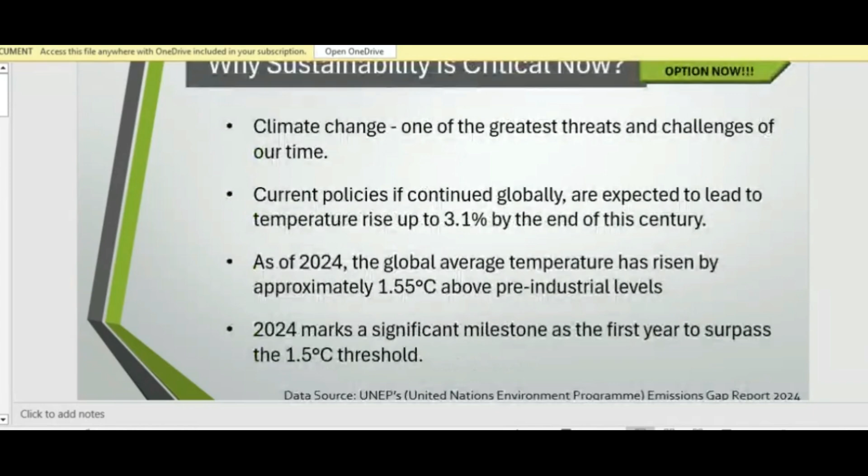So to start with, yes, sustainability. Sustainability is critical now. It is no more an option, it is a necessity. Why? Because the world is developing, economies are emerging, technologies are advancing, and as all these things happen, even population is rising. And as all these things happen, energy is a must - there's a lot of need for energy.

And as energy consumption increases, obviously there is an emission rise, because we generally depend on fossil fuels most of the time. So if you don't keep a check on this energy consumption, that fossil fuel energy consumption is going to give a drastic output on carbon dioxide emission, and the results are going to be catastrophic. Even it is said that if we don't check the emissions now, the global temperature can rise up to 3.1 degrees by the end of this century. It's a report which stated it can rise up to 3.1 degrees. Imagine what is the fate if the temperature rises up to 3.1 degrees. So it's going to have a catastrophic effect on planet Earth - the vitality of the Earth will be lost.

So this is the reason why we are here, discussing sustainability. In the Paris Agreement, it was agreed - I hope you are aware of the Paris Agreement, it's a part of COP21 in 2015 - it was agreed to limit the temperature rise below 2 degrees, and all countries are supposed to work towards attaining 1.5 degrees.

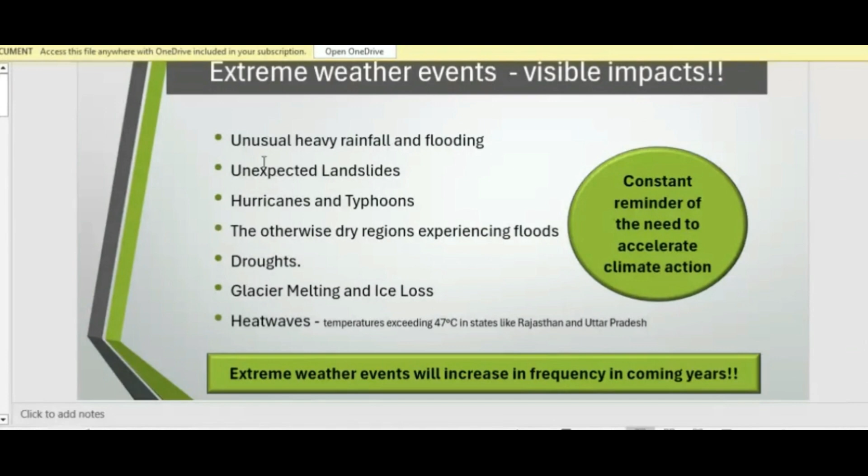So what are all these? These are constant reminders that we need to accelerate our action. We need to take action immediately, else the results won't be good. These things are not going to stop. These extreme weather event frequencies are going to increase in the years and days to come. So it's a caution for all of us.

And before going to the aviation area, let me introduce, maybe you might be aware, but I'll brush through all these global terminologies used in relation with climate change. So the first one is UNFCCC.

It's the United Nations Framework Convention on Climate Change. It was set up in 1992. It's the major global body which sets the framework for climate change, what action needs to be taken. It fights climate change, sets framework, supports international agreements, and promotes financial and technical support. More than that, it organizes the annual COPs.

You might be aware that last year, in 2024 November, we had COP29 at Baku, Azerbaijan. Every year before that, we have been having this Conference of Parties. COP is nothing else but the Conference of Parties. So we'll see what it is in the coming slides.

Next is the IPCC, again one of the important organizations, the Intergovernmental Panel on Climate Change. It was set up in 1988. It's again a UN body, a scientific body that assesses climate change year by year, and publishes assessment reports which form an input to the COP discussions and many other climate change discussions. It also assesses the impact of climate change and gives response strategies.

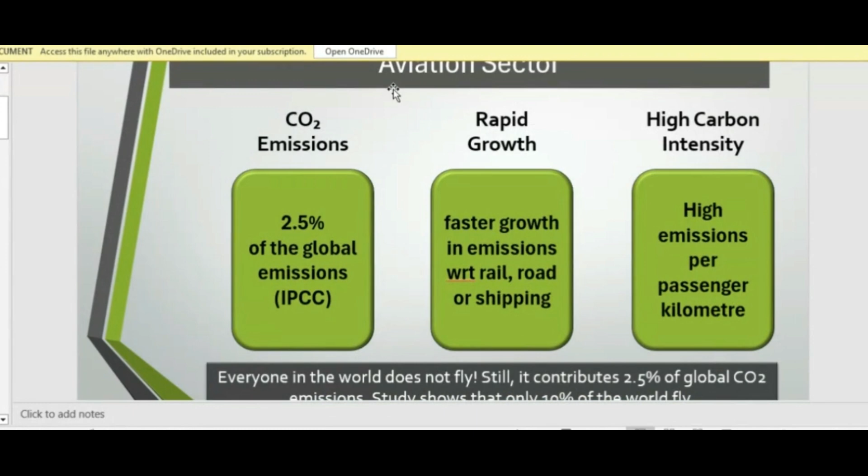Let's talk about the aviation sector. Why is the aviation sector important? Because 2.5% of the globe's total emission, that's a report published by IPCC, 2.5% of the globe's total carbon dioxide emission is from the aviation sector.

That too, while we know everybody does not fly on the earth. Hardly 10% of the people in the world fly as of now. But as they get richer and connectivity increases, obviously there are going to be more flights, more people flying. With the current 10% people flying, if the emission is already 2.5%, we can imagine what the emission will be if more people start flying. This is why it's alarming, this is said to be alarming actually.

There's a rapid growth in the aviation sector, as more and more people prefer to fly. People who wanted to travel, say 20 years back, from Cochin to Delhi, would mostly have chosen train travel. But nowadays people value their time, and tickets are available at comparatively lesser rates, so they choose flights instead. So there is rapid growth happening in the aviation sector, and with that comes faster growth in emissions. Compared to other transport media like rail, road, or shipping, the aviation sector is emitting more. It is a high carbon intensity area.

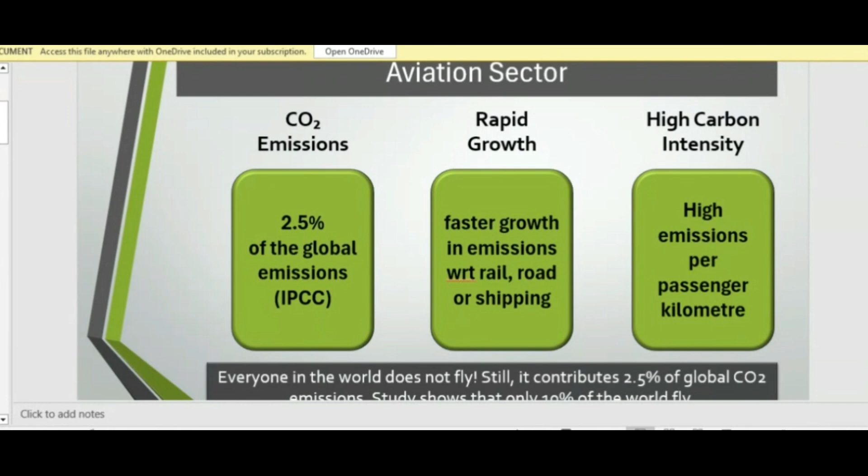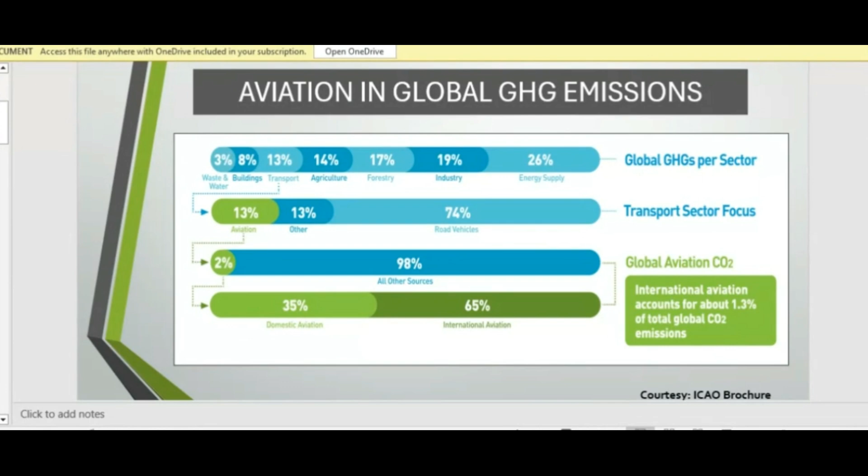Now, in this 13% global aviation, domestic aviation contributes 35%, and international aviation contributes 65% of aviation. So we can say that international aviation accounts for about 1.3% of total global carbon dioxide emissions. This is a report published by ICAO, and it is almost 90 to 95% realistic.

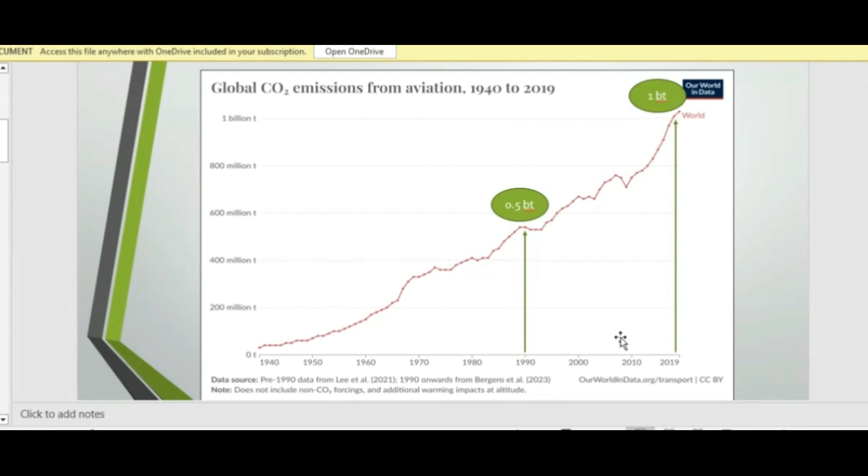So here is where you can see the scale of growth of emission by aviation alone, and the importance of sustainability in aviation. We just checked the quantifiable version of this aviation emission.

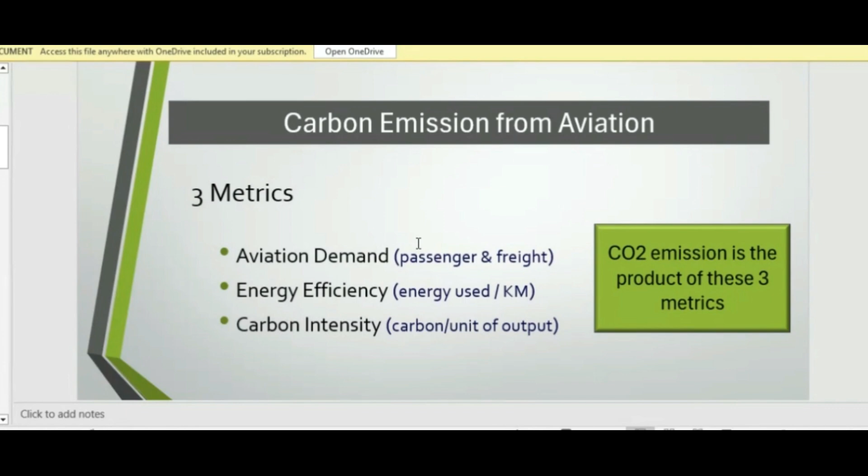Let us see the metrics one by one. Aviation demand represents the total passenger kilometers and total freight kilometers, how many passengers travel and what cargo freight transport happened. As we have already seen, between 1990 to 2019, the passenger demand and freight demand have approximately quadrupled, increased 4 times. More people are flying, more stuff is being moved around. People are opting for flight travel more and more.

Now let us see what is energy used, and its impact. Energy efficiency is the energy required per passenger kilometer, how efficient the fuel is.

Traveling one passenger kilometer in 1990 used to take 2.9 megajoules of energy. By 2019, this 2.9 megajoules has reduced to less than half, coming down to 1.3 megajoules.

So we can say flying has definitely become more energy efficient because of improved designs and technologies, larger planes, and more passenger load factor. Passenger load factor means there are fewer empty seats compared to previous flights.

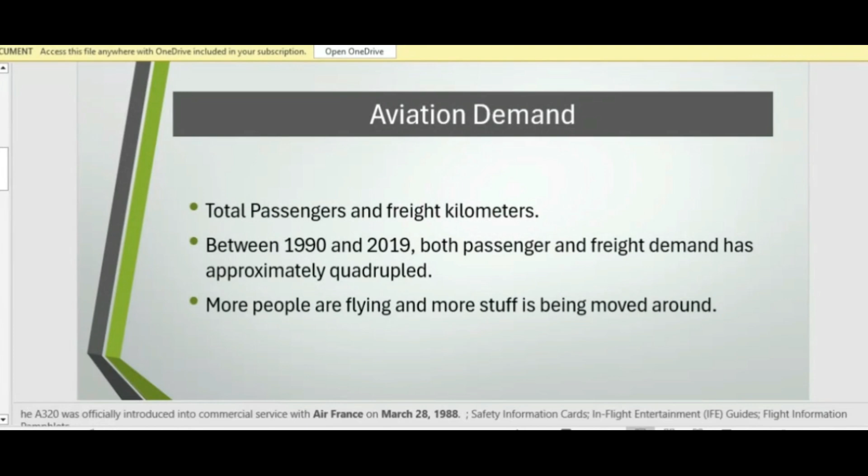Alternate fuels are there — yes, SAF has come into the market, but it is still a tiny fraction. So when we multiply all three, we understand that aviation demand has quadrupled and energy efficiency has increased twice.

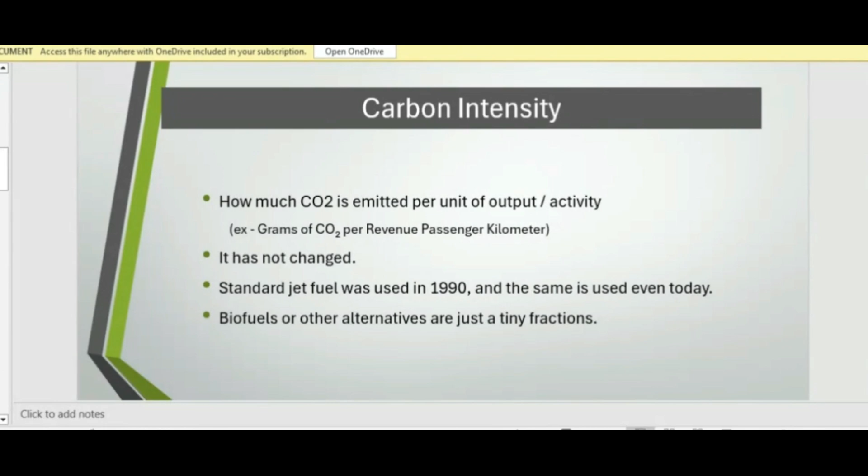In India, the Prime Minister has launched the UDAN scheme a few years back to increase connectivity, including rural and suburban connectivity. As connectivity increases, aviation passenger numbers increase, energy consumption increases, and pollution increases.

There's a metric showing that in 2025, revenue passenger kilometers (RPK) are expected to grow by 8%, reaching 5.2 billion passengers. It means this will be the first year it crosses 5 billion passengers — that's how the aviation sector is growing.

In terms of passenger volume prediction — how many passengers will be flying — 2019 saw 4.5 billion passengers. There was a drastic drop due to travel restrictions from Corona, but we reached the pre-pandemic level again in 2024, and by 2025 it's expected to reach 5.2 billion.

And by 2040 and 2050, there's a considerable increase — it's going 4 times higher compared to 2025. It's estimated that by 2050, 25 billion passengers will be using airlines.

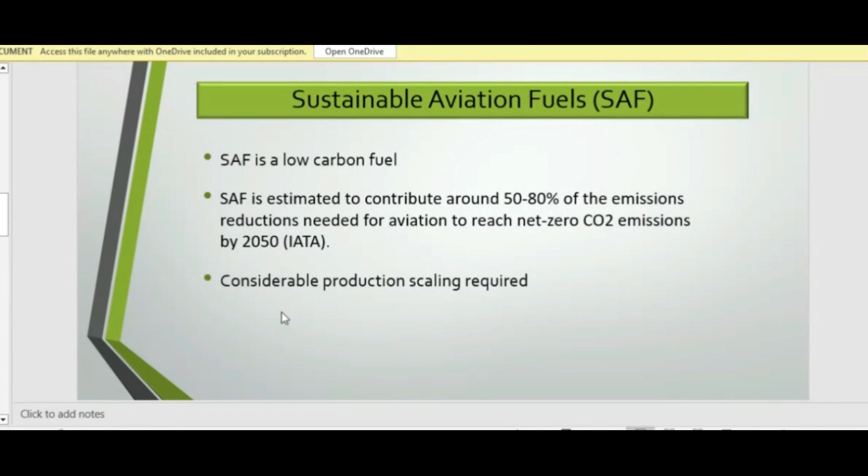Sustainable aviation fuel is a low carbon fuel, and it is estimated that it will contribute around 50 to 80% of the emission reductions needed for aviation. This is estimated to drastically change the pollution contribution from the aviation industry if we adopt it as soon as possible. However, there are challenges in SAF which we'll see.

First, let us see what sustainable aviation fuels are. They are produced from biomass feedstock as well as non-biomass feedstock. Feedstock is the input material that goes into making this aviation fuel. Biomass feedstock can be waste oils and fats, like used cooking oil, animal fats, agricultural residues like straw and corn stover, forestry residues like wood chips and sawdust, even dedicated energy crops and microalgae.

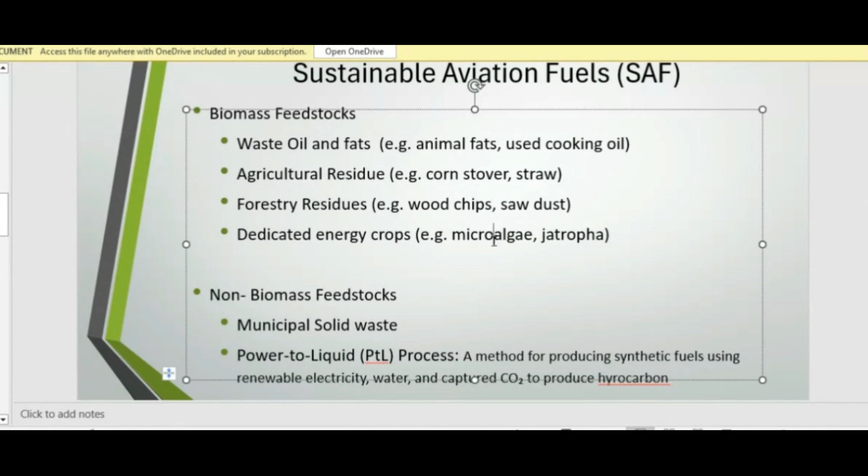Microalgae is under R&D because it can store lots of lipid, lots of fat in its body, and it needs less space and land compared to any other biomass feedstock. This is under R&D, and if it succeeds, it will be a boon to the aviation industry for using sustainable aviation fuel.

Coming to non-biomass feedstock, this includes municipal solid waste like cardboard and organic material that we throw away, which can be used as feedstock for sustainable aviation fuel. There's also the power-to-liquid process, another gaining methodology, producing synthetic fuels, also called e-fuel, using renewable electricity, water, and captured carbon dioxide. Water is split by electrolysis into hydrogen and oxygen.

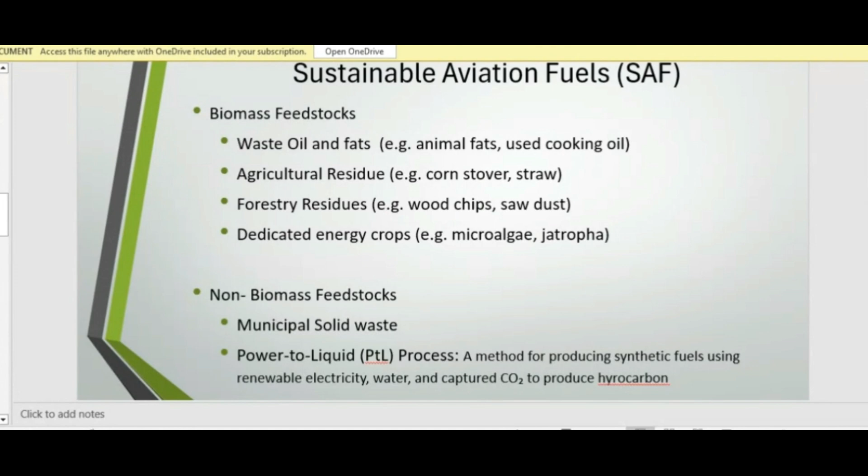This hydrogen and captured carbon dioxide are used to produce hydrocarbon, which can later be converted into fuel. So now the question is, sustainable aviation fuel is gaining importance, but can we use it as such, or do we need to do any modifications?

As per ASTM allowance, the American Society for Testing and Materials has said we can blend 50% of SAF with existing jet fuel with no problem. It can be used in current aircraft and engine conditions, with no major modifications required in the engines. It's called a drop-in fuel because it can be used with 50% blending and work seamlessly without any problem.

But when it comes to infrastructure, like fuel lines, storage systems, refueling vehicles, etc., these are the facilities required to fill the aircraft with fuel. All of these, pipelines, storage systems, and refilling vehicles, are compatible with the SAF blend and can be used as such.

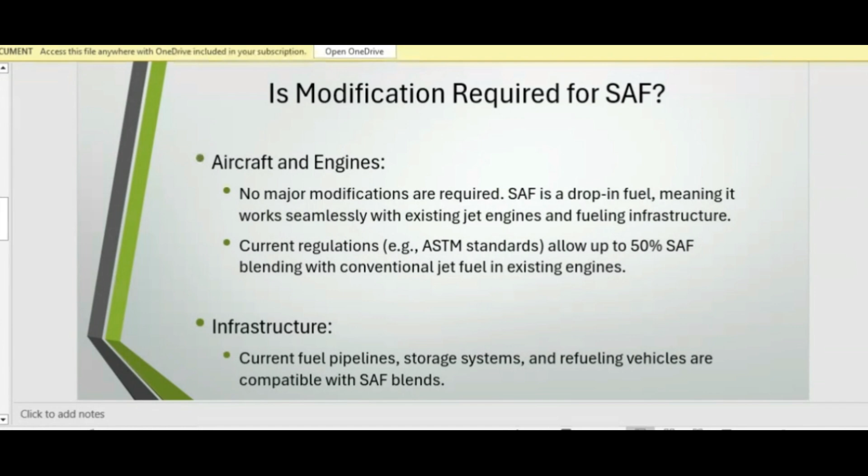So currently the allowance is given only for 50% blending, and R&D is happening to use 100% SAF in existing aircraft, as well as development of new aircraft which can solely work on SAF. So now what is the current usage of SAF?

As I told you, we can blend up to 50% with conventional jet fuel. Theoretically we could use it in much higher concentration, but as per the permission given by ASTM, the industry is using it at a 50% blending rate.

Currently the SAF production is very low, only about 0.3% of global aviation fuel consumption. Suppose in 2024, our demand for global fuel was 300 billion liters, whereas the production of SAF was only 900 million liters. So it was covering only 0.3% of global aviation fuel consumption.

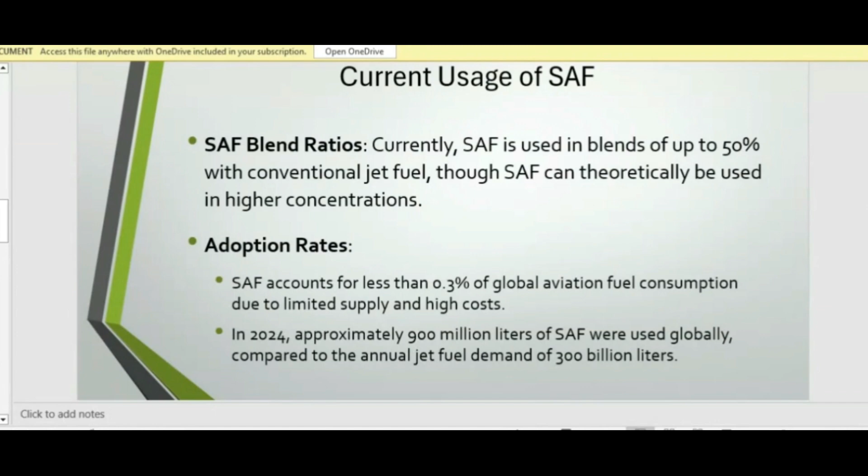So the production rate is very low because it is highly finance intensive, as well as the land required is very high, since it uses biomass. So there are so many constraints. We'll see one by one what those constraints are in the coming slide.

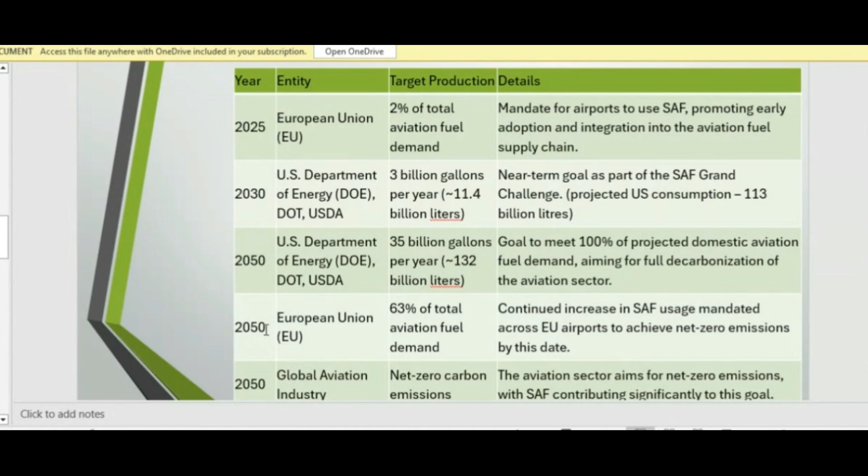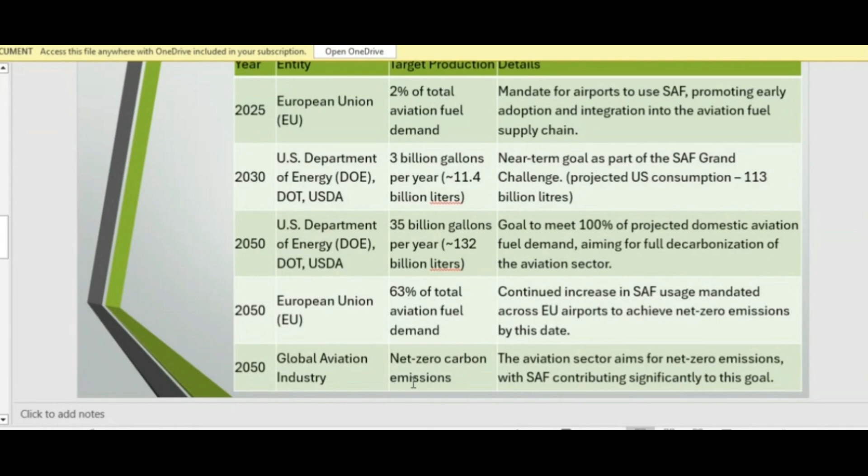And when it comes to global aviation, by 2050 we are aiming for net zero carbon emissions, and SAF has a very important role to play in global aviation.

So all aircraft manufacturers, how are they supporting the use of SAF? Major manufacturers, as we know, are Boeing and Airbus. Most flights are either Boeing or Airbus. So Boeing has already committed that they will be...

delivering aircraft capable of running on 100% SAF by 2030. Because currently, as I already told, we don't need much change in the current infrastructure, aircraft engines or propulsion systems, but still the fuel is different, the combustion and the physical and chemical properties are different. So aircraft manufacturers are trying to adapt to SAF alone and produce aircraft which can solely work on these sustainable fuels, and by 2030 Boeing has committed they will be able to deliver these aircraft which run on 100% SAF.

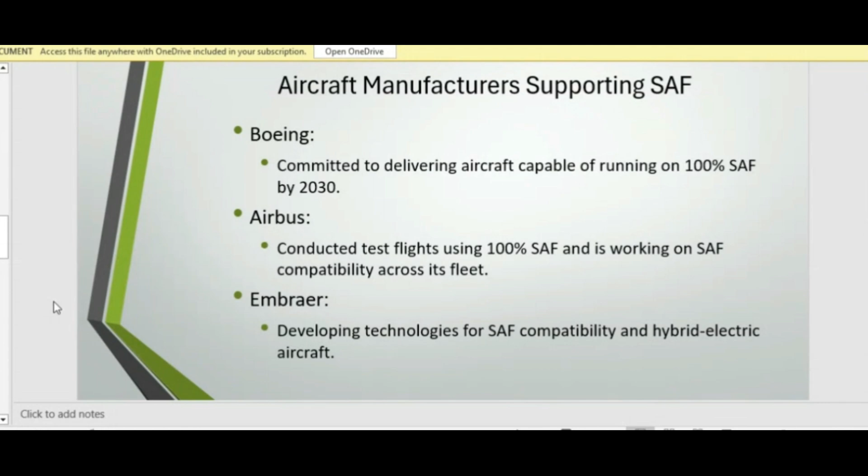Similarly, Airbus has already conducted test flights using 100% SAF, and they are also working toward attaining SAF compatibility across their fleet. The same is true for Embraer, which is developing technologies for SAF compatibility and also trying for hybrid electric aircraft.

So what are the challenges in SAF? The first challenge is the high cost; the production cost is very high. It's also limited in availability. As I told you, only 0.3% is getting produced when the demand is very high, only 0.3% of the total demand is getting produced annually.

So obviously the cost will go high, and currently the cost of SAF is 2 to 5 times more expensive than conventional jet fuel. This is because of the limited production capacity, as well as the feedstock cost. The feedstock, whether biomass or non-biomass, the production cost is very high. So these two are adding up to the high cost of SAF.

Now also the limited feedstock availability. The sustainable feedstock available, like cooking oil, waste cooking oil, or used cooking oil or waste biomass, is not always available in the same quantity. And if we want to grow this feedstock, you can imagine the amount of land required. It can even compete with our agricultural land.

There is one more worry that environmentalists generally have. They are nervous that if SAF gains importance, even deforestation can happen. They can cut trees to plant these feedstocks for biomass feedstock for aviation. So another worry is that it can pave way for deforestation also. This is a concern. Land use can change, like what is being used for agriculture can change to developing this feedstock instead.

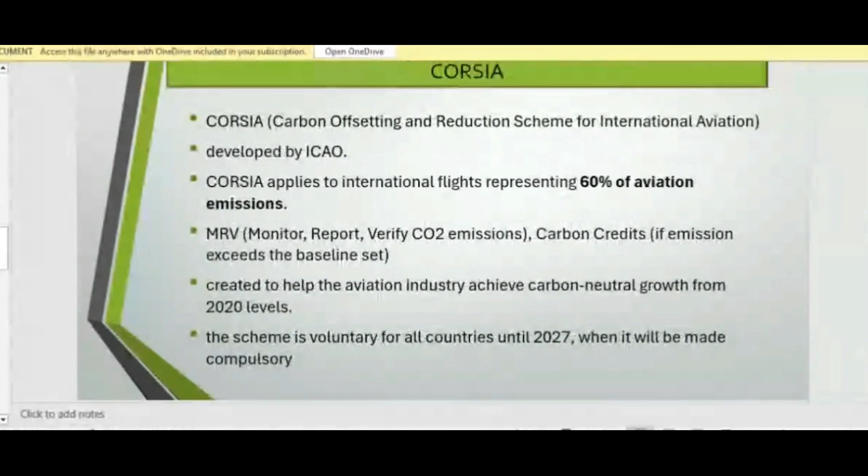So that was the market-based measure, CORSIA. Now coming to aircraft-related technology, how it is going to help us in sustainability. Advanced propulsion systems - engines, like hybrid electric, as I already told, are under R&D. Even fully electric propulsion systems are under R&D. There are two companies, Heart Aerospace in Sweden and VoltAero in France, which are working on hybrid models, like hybrid electric engines.

Heart Aerospace has already demonstrated a fully functional technology demonstrator and is testing it. So once it is proved, it can definitely become a reality.

When it comes to fully electric propulsion systems, it depends on so many things. It's not achievable in the near future. It should basically work using batteries, and batteries make it very difficult to energize the aircraft and give it thrust while flying.

It's going to be very difficult, but efforts are still ongoing on this front. Next is lightweight materials. Composites are gaining advantage here. If we reduce the weight, like in the automobile sector where cars like Maruti reduce weight to improve mileage, similarly if weight reduces, efficiency also increases. So composites are being used more and more.

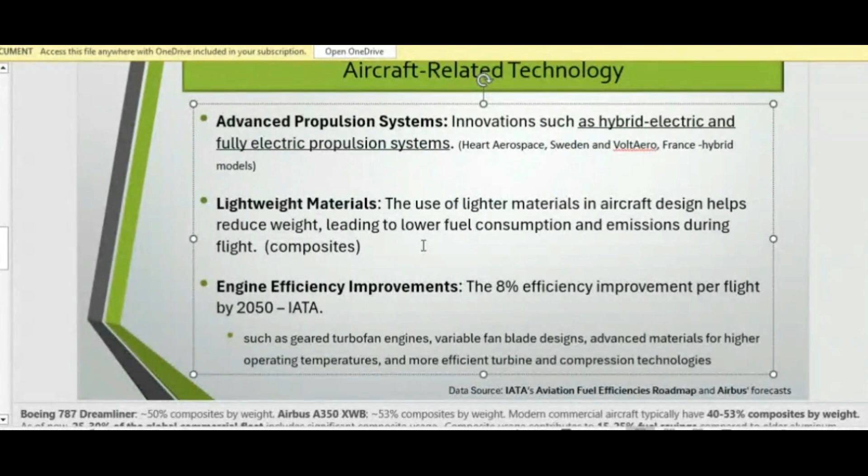That covered aircraft-related improvements. Now, operational improvements—what is covered under aircraft operations? Aircraft operations include activities on the ground before passengers and cargo are loaded, taxiing to and from the runway, and the climbing, cruising, descent, and landing stages.

In ground operations, before passengers and cargo are loaded, multiple activities take place, like refueling, cargo handling, passenger baggage handling, catering services such as food supplies being arranged in the aircraft, cleaning, pre-flight inspection, and crew briefing.

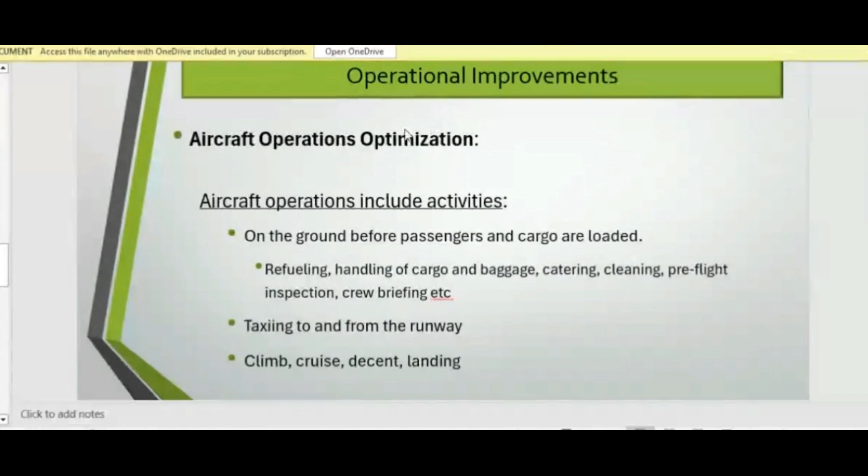So these are various aircraft operations happening before takeoff, before passengers and cargo are loaded. Now there are certain measures we can bring in to improve these operations too, as listed out by ICAO in the brochure.

The first measure is operating the aircraft at the most economic altitude and speed while in the air. Next is the aircraft load factor as passenger load factor, which I mentioned in a previous slide—it should be maximum. An aircraft should not fly with even one seat empty.

Next is loading the minimum fuel needed to safely complete the flight. As the quantity of fuel increases, more fuel is needed to lift and fly the aircraft. So if we keep it at the minimum safe level, considerable reduction in fuel consumption will be seen.

Next is minimizing the number of non-revenue flights. What is a non-revenue flight? It's where payment is not happening—it may be ferrying the aircraft, training, testing, or anything similar. Minimizing these flights is another operational improvement measure where emissions can be reduced.

Taxiing in the most effective way, taxiing and flying in the most fuel efficient way - some aircraft generally use both engines while taxiing, but single engine can be resorted to when taxiing on the ground.

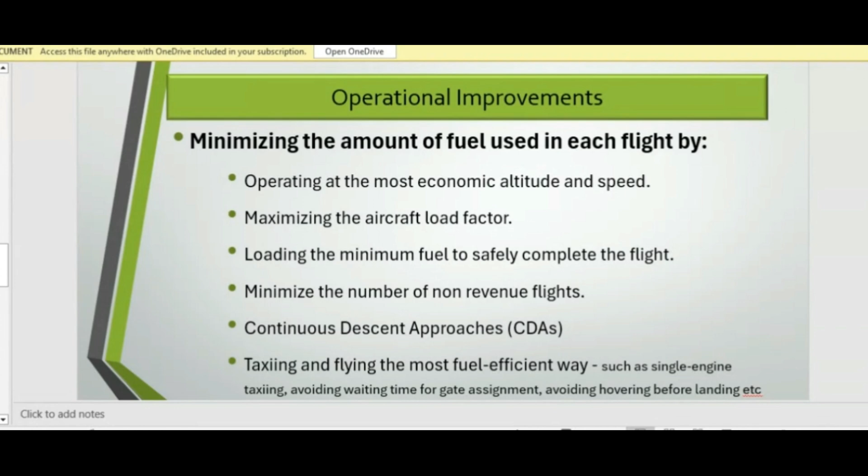Some aircraft will be hovering for almost 30 to 40 minutes. The total distance between destination A and B will be for 30 or 40 minutes, but after reaching the destination point, it will be hovering around the airport to get clearance to land. This is a wastage of fuel, and it can be avoided through operational improvements.

Let us see where India stands in all these things. The Indian aviation sector is contributing only less than 1% of India's total emissions. This is something good to see, but we cannot be happy about it, because the carbon emission from Indian aviation has considerably increased from 2012 to 2019 - in these 7 years, there's a considerable increase of 64% in emission.

So the first sentence about India's aviation sector contributing only 1% is nothing to be happy about right now, because it is definitely going to change in the coming years. India is going to overtake UK as the third largest air passenger market this year, so there is going to be more fuel consumption and more emission.

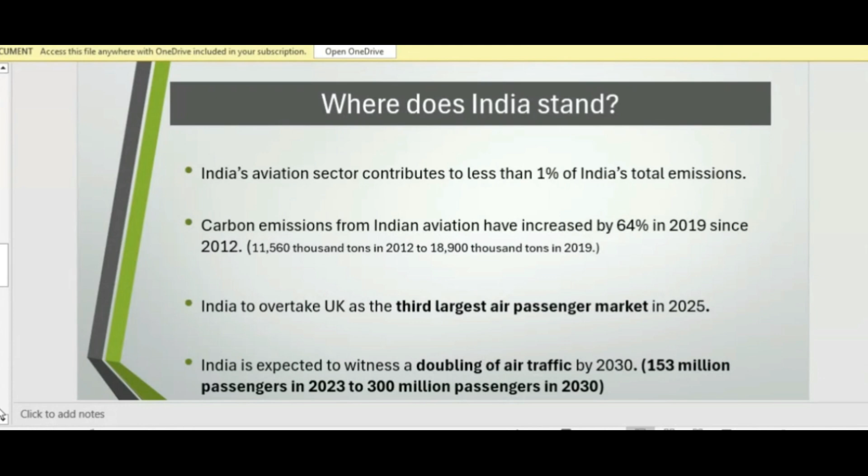India is going to witness a doubling of air traffic by 2030. In 2023, hardly 150 million passengers were flying, and by 2030, in the next 5 years, 300 million passengers will be flying. So it is going to be carbon intensive.

Now growth in the Indian aviation sector - the Indian aviation market was 12.58 billion dollars in 2023, and it is expected to grow at a CAGR of 11.25%, which is way more than our PF investments. It is growing at this rate, reaching a value of $26.54 billion by 2030. So you can see a significant increase in the Indian aviation market size.

The Indian government has launched UDAN - Ude Har Desh Ka Nagrik - which is instrumental in increasing air connectivity to smaller cities. As the UDAN scheme picks up, we can see more and more flying. According to IATA, this aviation sector is contributing approximately 5% to India's GDP, and it supports 8 million jobs.

So this is a sector which is very much required for our growth also - we cannot simply avoid it, we have to take sustainable action. Aviation sector can contribute $250 billion to India's GDP annually from this year. So this is a major sector in India which needs to be considered for sustainability, because it is growing significantly.

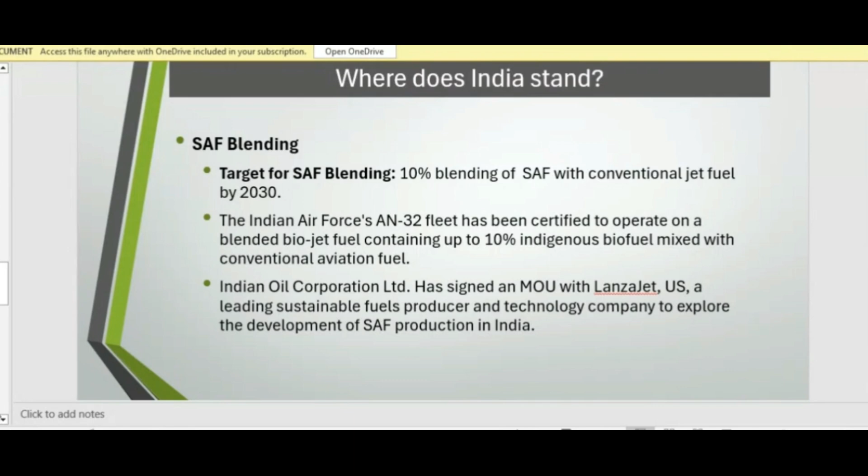Now, what are the challenges to sustainability in aviation? Yes, we have seen the strategies, the targets, and the climatic conditions prevailing, and how it is going to rise in the coming future. There are some challenges we need to overcome to achieve sustainability.

The first challenge is high emissions. The emissions are going to rise. As countries develop and economies surge, emissions are also going to grow. The aviation sector accounts for 2 to 2.5% of global human-induced carbon dioxide emissions, but emissions have doubled since the mid-1980s. So we can expect more emissions in the coming future.

Projections suggest that demand for air travel, which we have already seen is going to increase, could even become 4 times compared to today by 2050. So emissions will rise proportionately.

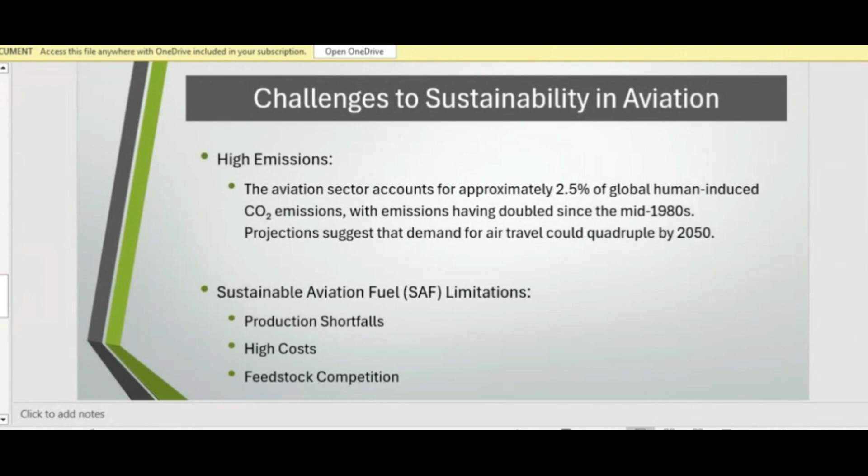The second challenge is the production of SAF. SAF gives us a very positive outlook when it comes to reduction, 50 to 80% reduction of emissions from the aviation industry. But it still has its own limitations and production shortfalls that we've already discussed: the high cost, which is around 2 to 5 times higher than conventional fuel cost, and feedstock competition, meaning feedstock should not compete with land use or agricultural crops. These are the constraints and challenges from the sustainable aviation fuel area.

There are other challenges in aviation sustainability, like technological barriers. As we discussed, hydrogen and electric aircraft face issues. Electric aircraft have lower energy density because batteries will not give us the output we require per unit weight, compared to the higher output from conventional fuel. So we need to see how far this is going to sustain. But R&D is happening, and let's hope we get a very positive output from both the hydrogen and electric aircraft projects undertaken.

Now, infrastructure needs for SAF, which we've been discussing in the past few slides. For production, distribution, and blending of SAF, we need big infrastructure, and this infrastructure will call for investments. So funding requirements come in, and the world is struggling for funds when it comes to sustainability and climate change, climate finance.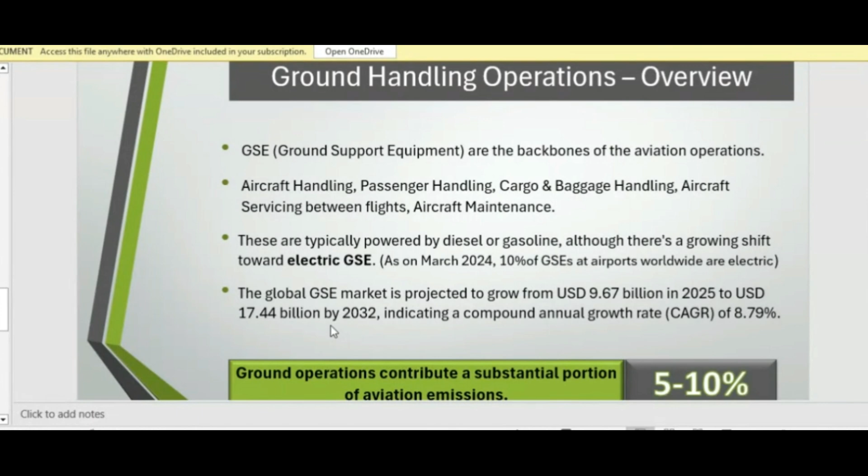The thing to note here is GSE emissions. Emissions from these ground operating vehicles which use diesel and gasoline are almost equal to 5 to 10% of the aviation emission from the aircraft. So this is again considerably high, and there's a large scope of improvement in GHGs also.

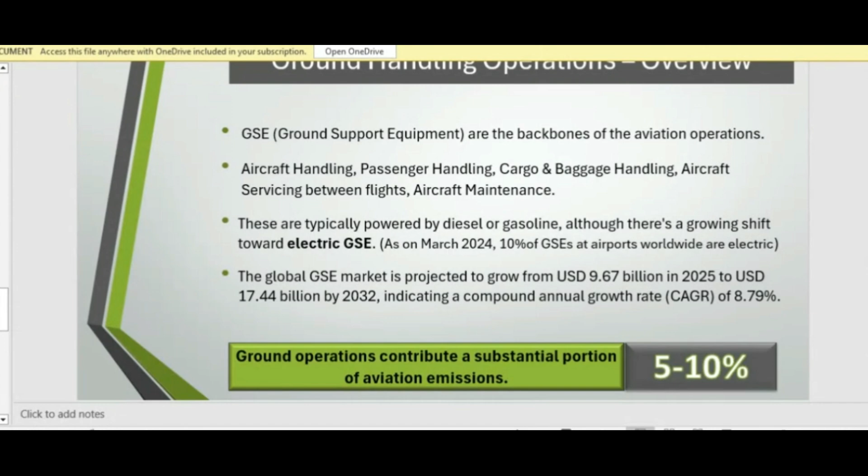So what are the various ground support equipments used? Tow tractors and trucks. Tow tractors are the vehicles used to tow the aircraft. When aircrafts are parked near the gates, they will be towed using pushback tractors, like trucks or tractors, because engines cannot be operated there. It is not safe to operate engines near the gate areas, so generally it is towed using tow tractors.

Not only that, it is fuel efficient, since burning jet fuel is more carbon intensive than burning diesel or gasoline. So generally, movement of aircraft on the ground is done by tow tractors and trucks, except when the aircraft is on the taxiway.

Then passenger stairs. When we board the aircraft from the apron, we can see these passenger stairs, supported by a truck which is diesel operated. Then boarding bridges - when we directly enter from the airport to the aircraft, we use passenger boarding bridges, or jet bridges.

Then baggage carts. When we check in our baggage, at the backside these baggages will be transported through carts to the aircraft. Now there are belt loaders - generally when we pick up our luggage we can see conveyor belts will be there. These are again ground support equipment for the aviation industry.

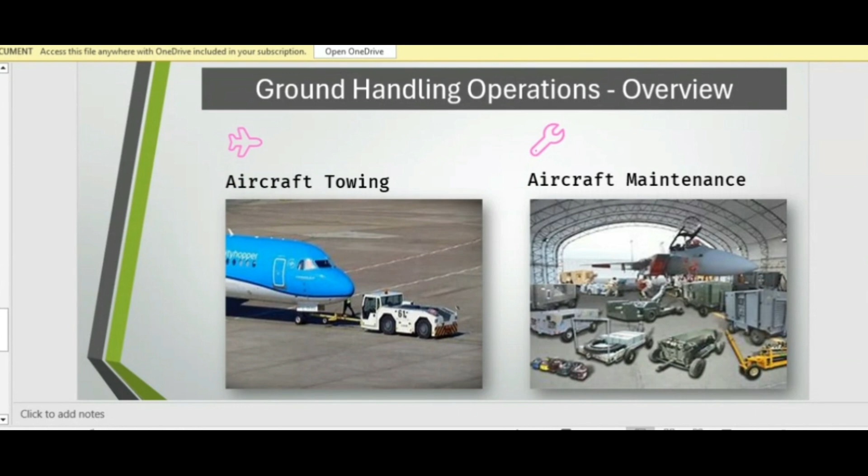So these are just a few examples. GSEs are available, around 100 in number per aircraft model. As the number of aircrafts and aircraft types increases, the number of ground handling equipments also increases at every airport. So I've just shown a few here which operate on fossil fuels.

So what is happening on the ground handling sustainability side? Electrification, as I mentioned, is a major move. As of 2025, the electric segment is projected to account for approximately 37.9 to 40% of the GSE market, meaning whatever GSEs are being produced, around 37.9 to 40% of the vehicles will be electric.

That's the norm. Presently, if you look globally at the usage of electric GSEs, in Switzerland, Swissport is using almost 44% electric GSEs, and they want to increase it to 55% by the end of this year.

Similarly, they want to completely transform into electric GSEs by 2027. So this airport is making drastic changes on the GSE front, which is why I posted this data here. The same approach can be taken as an example by various other airports too.

Now in India, our baggage trucks are being taken over by electric baggage trucks. Electric passenger stairs are coming into the picture. Belt loaders are electric now, and passenger ramps are electric now. So we are also resorting to electric GSEs in our airports.

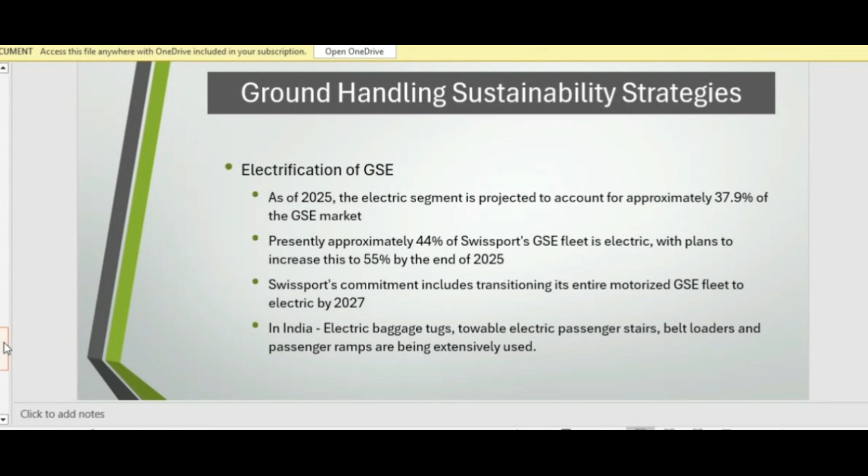And yes, if you see, the conveyor belts are working on electricity too, but still there are lots of areas of improvement, and we need to take a lot of action on the GSE front in India as well.

Now, this is hydrogen powered GSE. This is emerging as a potential zero carbon solution for aviation as well, and investment is also increasing in R&D of hydrogen.

But the main challenge here is storing hydrogen. It has to be stored at a sub-zero, cryogenic temperature, like minus 253 degrees. So it's a challenge to store hydrogen especially in the aviation sector.

Or it can be stored in liquefied form, which requires storage at minus 253 degrees Celsius cryogenic temperature. Or we can store it as compressed gas, but unfortunately the output from compressed hydrogen is less compared to conventional fuel.

So this is a challenge with hydrogen powered GSE, but there are still R&Ds happening in hydrogen powered GSEs across the globe, like in the UK. Bristol Airport has already done trials with hydrogen powered baggage tractors and some other GSEs, and it has been successful.

And again in the UK, another airport, Exeter Airport, has trials of hydrogen-powered GSEs, especially in the GPU, which is a very fuel-consuming GSE. So especially in this area they are trying hydrogen, and also in the pushback tug.

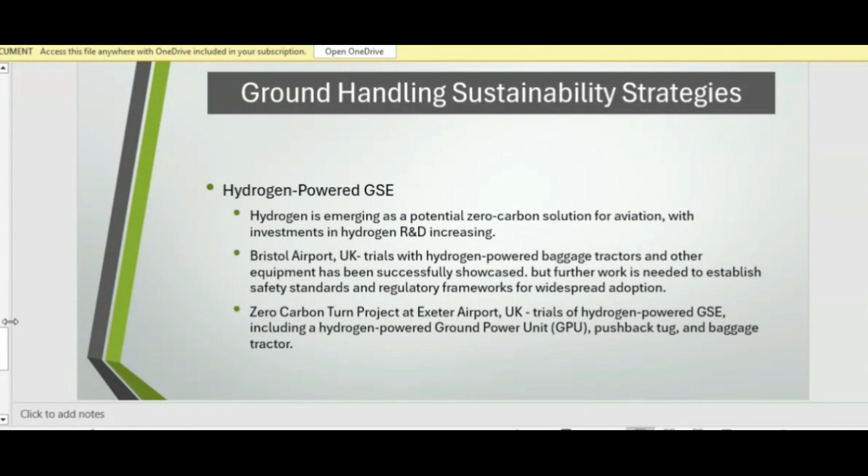Now, then again, hybrid GSEs. Work is happening on this front, where electric cum gasoline powered or diesel powered vehicles will be used - electric power will be used where low load usage is there.

This electric power will be supported by batteries. So where low load operation comes, electric power will be used, and where high load operation comes, diesel will be used. This way, hybrid baggage trucks have already come, and hybrid pushback tractors have already come, and this is operational in some airports.

For example, John F. Kennedy Airport is using this hybrid GSE. So this is one area where we can definitely work upon, and this will have a large scope for fuel reduction.

Then yes, there are solar powered ones as well. This cannot be used in big units like GPU, ACU, and all.

But small things like passenger boarding ramps and bridges, we can go for solar powered because the energy required will be less, so it can be sustained through solar. This is already in use in UK, New Zealand, and some countries in US also.

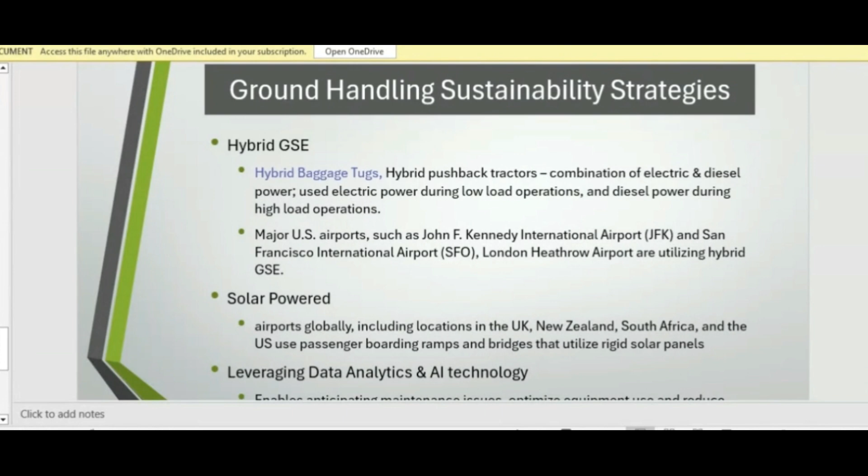Another thing is leveraging data analytics and AI technology. It's like using real-time monitoring of GHA, GSE, coordinating between them, knowing when maintenance is required. All those things can be done if we employ AI technology, IoT and all, so that will be very helpful and should be used in airports. But airports should be capable of implementing these technologies, infrastructure development will be required, which will require funding again.

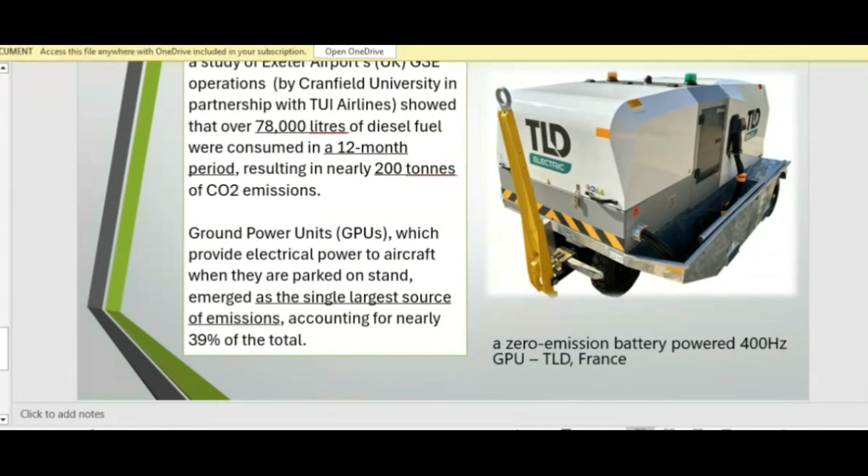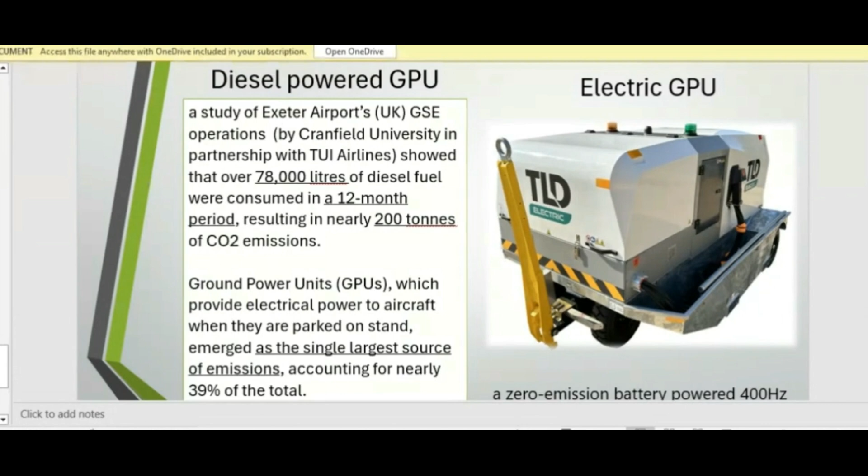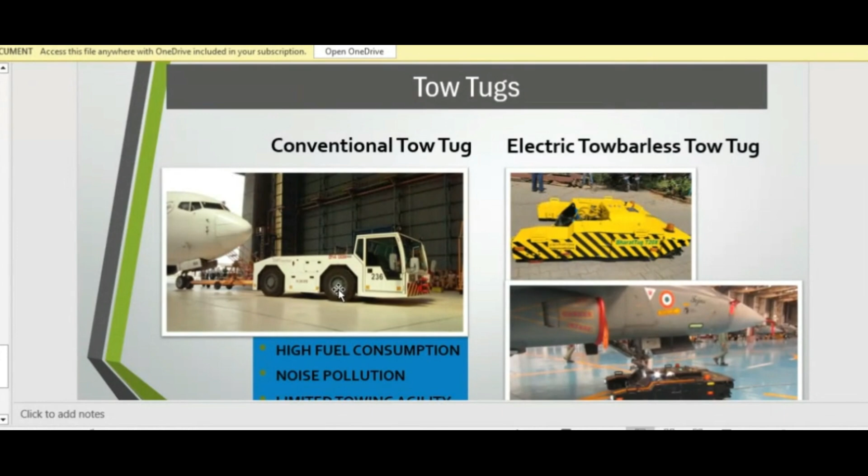Next, these are just a few examples. This is a conventional tow tug, used to tow the aircraft from point A to point B. Conventional tow tugs have high fuel consumption, noise pollution is there, and their agility is less because they are connected to the aircraft through a tow bar. You can see a tow bar here. Because of that, the agility is less, and their weight is very high. They can weigh up to 10,000 kgs, thus consuming more fuel.

Now electric tow bar-less tow tugs have come into picture. Many companies like Mototok, TLD are manufacturing these electric tow tugs, which can directly take up the nose landing gear of the aircraft on its body and move the aircraft wherever it wants. Fossil fuel consumption is zero because it uses rechargeable batteries, and noise pollution is again zero, below 50 to 80 decibels. The limited towing agility problem is sorted out because it can go and park in a very limited space. The weight is much less too, a tow bar-less tug weighs somewhere around 2000 to 3000 kgs, so you can see considerable improvement in these technologies.

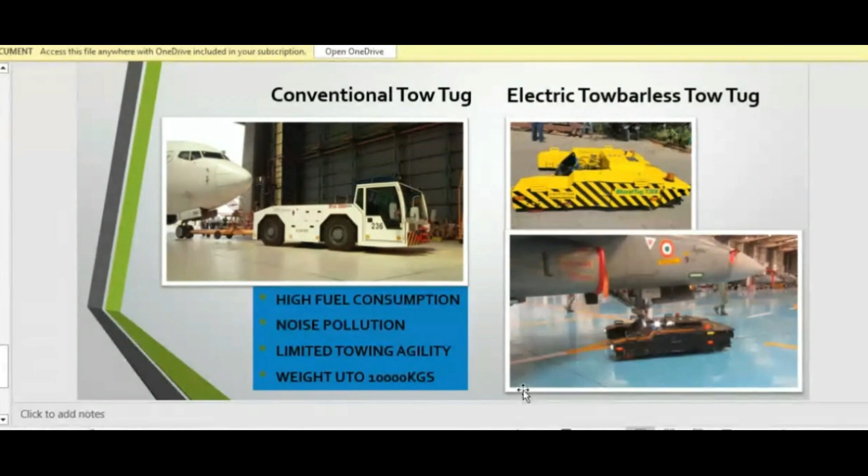This is a tug manufactured by my company, it is under prototype. It was tested with the Air Force, our customer, in one of the hangars at the airport. This is a testing photo, and the product's first testing has been successful. Further improvements are underway. This is the first prototype to be delivered, not yet delivered, testing is under progress, that's why I showed it in this slide. Just to show that many companies, this is a startup where I work now, are working towards sustainability in whatever manner they can.

So again, there are challenges for these green GSEs also. One is investment, as we have been discussing, investment is substantial. Infrastructure like power grids will be required when we resort to electric GSEs. We need more and more innovations, creative innovations should come into picture. When we do innovations, R&D efforts will be more, and it comes at a higher cost, so finance becomes a challenge again. If we use electric vehicles, it works on batteries, and there should be eco-friendly manufacturing of these batteries, and after the batteries are worn out, recycling becomes very important, this is again a challenge.

The next is adopting hydrogen as a green energy solution, but the cost of production, complexity in installation, maintenance, and storage, everything is a challenge when it comes to hydrogen as a green energy in the aviation sector.

Now, again, we have been talking about finance. If we need to have a sustainable change, we need finance, and finance is needed for developing countries. As we all know, the past 100 years of industrialization has resulted in today's level of emission, and today we are facing a do or die situation. And the benefit of this industrialization has been taken by the developed countries.

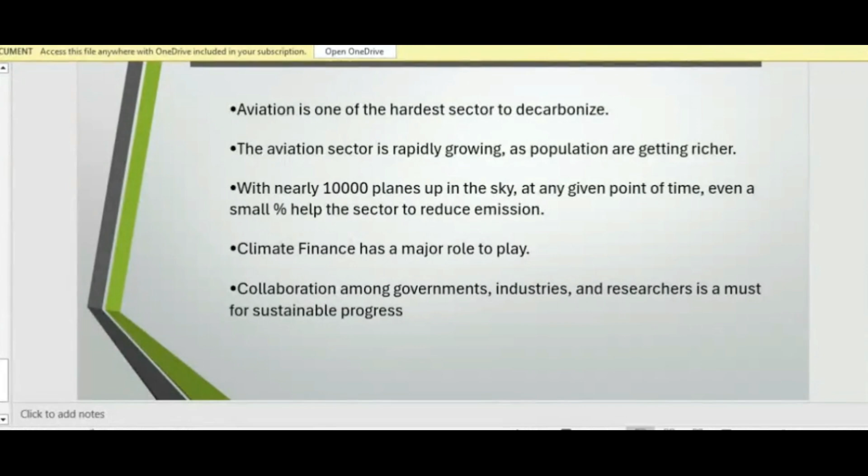As I had mentioned, the SCF, the Standing Committee on Finance, a UN body, has estimated that the annual financial needs of sustainability, climate finance, is around $450 billion to $584 billion. And what has been agreed in the new collective quantified goal is $300 billion per year from developed countries starting 2035, which is nowhere near enough—it hardly covers half the needs of 98 developing countries. So this is where we understand that finance is going to be a big challenge in sustainability.

Coming to the conclusion slide, yes, aviation is one of the hardest sectors to decarbonize, and it's a growing sector. We should know that at any point of time, 10,000 planes are flying in the sky, so even if we can bring in a small change, the net effect is going to be very good. It can contribute towards considerable reduction in emission. And finally, again and again, I'm telling climate finance has a major role to play, and collaboration between various governments, various industries, and researchers is also a must.